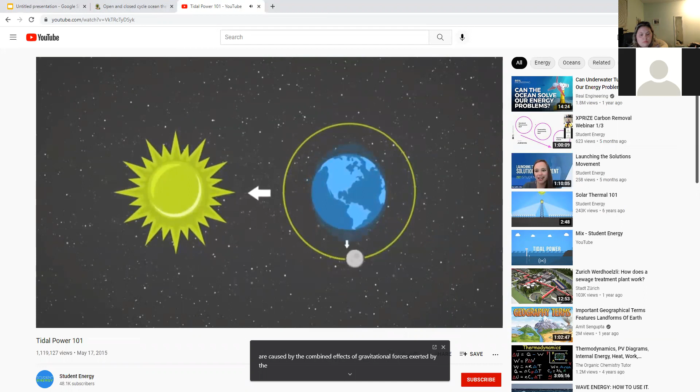Tidal power is a form of hydropower that converts the energy from the natural rise and fall of the tides into electricity. Tides are caused by the combined effects of gravitational forces exerted by the moon, the sun, and the rotation of the earth.

And I'll talk about that a little bit more later on, about the role that the moon plays in tides and in energy in general. Plants can only be installed along coastlines. Coastlines often experience 2 high tides and 2 low tides on a daily basis. The difference in water levels must be at least 5 meters high to produce electricity.

Tidal electricity can be created from several technologies, the main ones being tidal barrages, tidal fences, and tidal turbines. So you'll notice too that these 3 sources of tidal energies are the ones that are covered in the book. So this is a pretty standard way of thinking about tidal energy. Tidal barrages are the most efficient tidal energy sources.

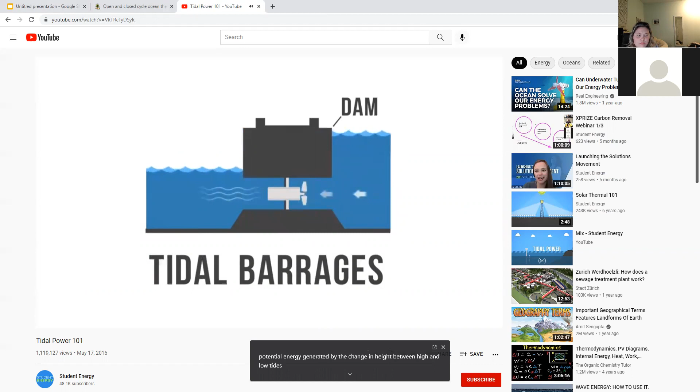A tidal barrage is a dam that utilizes the potential energy generated by the change in height between high and low tides. This energy turns a turbine or compresses air, which in turn creates electricity. So I'm gonna pause there really quick too, so you can see that picture in the left corner there.

And I think that is really interesting because if you've got anything out of the past couple of weeks, a lot of these alternative energy forms are using the same principles. Like I just mentioned, motion is a typical principle because it's kinetic energy and we can convert that. But looking at that tidal barrage, essentially what they're doing there is it's almost like a hydroelectric dam that we talked about a couple of weeks ago, right?

Where you had an area that was at a higher point of water, so they dammed a higher elevation point, and then when they released, all that water fell because of gravity, and then made a turbine spin. So it's kind of a similar situation here. They're just utilizing a natural situation.

So the benefit of that tidal barrage over a hydroelectric dam, or I guess I would say not the benefit, but the similar thing is you're having a barrier that's keeping the water. And when you release that barrier, that water is going down. So again, just a similar situation there, but it's utilizing something more that's a natural situation that happens. We're not changing the environment in that sense.

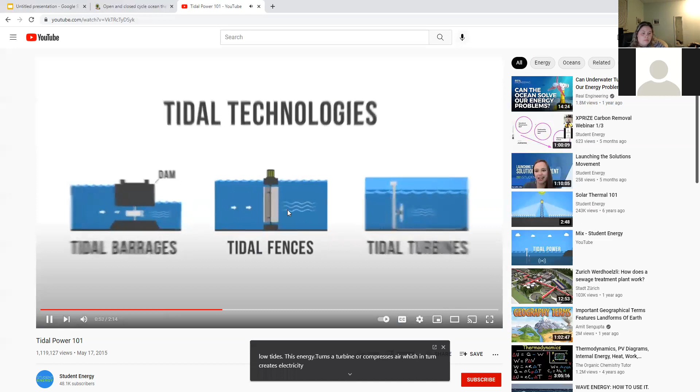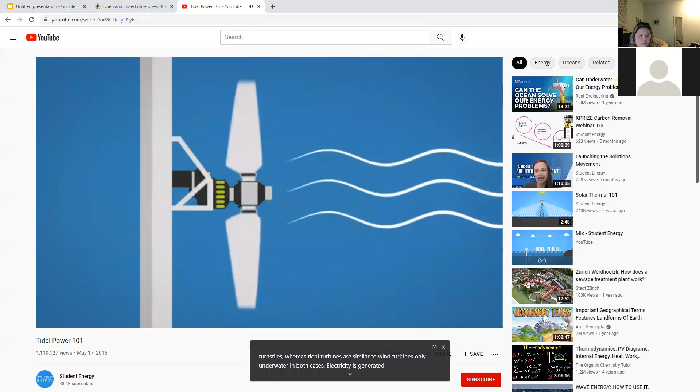Tidal fences are turbines that operate like giant turnstiles, whereas tidal turbines are similar to wind turbines, only underwater. In both cases, electricity is generated when the mechanical energy of tidal currents turns turbines connected to a generator. The generator produces electricity. Ocean currents generate relatively more energy than air currents because ocean water is 832 times more dense than air and therefore applies greater force on the turbines.

Tidal power is easy to install and renewable, having no direct greenhouse gas emissions and a low environmental impact. Because the ocean's tidal patterns are well understood, tidal energy is a very predictable energy source, making it highly attractive for electrical grid management. This sets it apart from other renewables that can be more unpredictable.

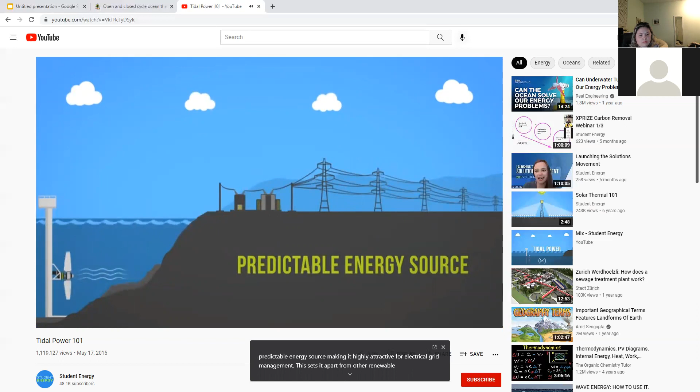However, adoption of tidal technologies has been slow, and so far, the amount of power generated using tidal power plants is very small. This is due largely to the very specific site requirements necessary to produce tidal electricity. Additionally, tide cycles do not always match the daily consumption patterns of electricity, and therefore do not provide sufficient capacity to satisfy demand. I think that was a question on the tidal energy quiz if you haven't taken it yet.

So it was that idea right there that it doesn't always create consistent electricity because you're not always getting the same amount of water, like with the barrage, entering the area. That's tidal power.

But okay, hopefully that was a good introduction of how tidal energy is working. Again, I'm going to stress this point because it is very, very important. You'll see at the end there that they still had a turbine, right? The turbine was moving and that was generating electricity. That is the key to all this alternate energy.

All of these sources, eventually the intent is to get a turbine moving, either by motion, by gravitational force or something. Get that turbine moving, because that mechanical motion of the turbine moving is what can create electrical energy, and electrical energy we can harness to create electricity.

So just bringing that up again. A couple more key points about tidal energy: it's produced during the rise and fall of the ocean water, the tides. It's similar to wave energy in the sense that it's harnessing the movement of the ocean.

However, it is more predictable. The time frame for when there's a high tide or a low tide is very much known and can easily be found. So that's why it is more predictable than wave energy.

I just want to say, when it was talking about tide, it's a very interesting thing. If you go just north of Maine, there's the highest and lowest tide, and that's where, as I showed with the globe, the water gains and gets larger, then moves to the sides, based on how the moon was going around it. The highest and lowest tide there is the craziest thing—it's like 3-4 stories tall, maybe higher, and then within 3-4 hours or more it's completely drained, you could see the very bottom of it. It's crazy.

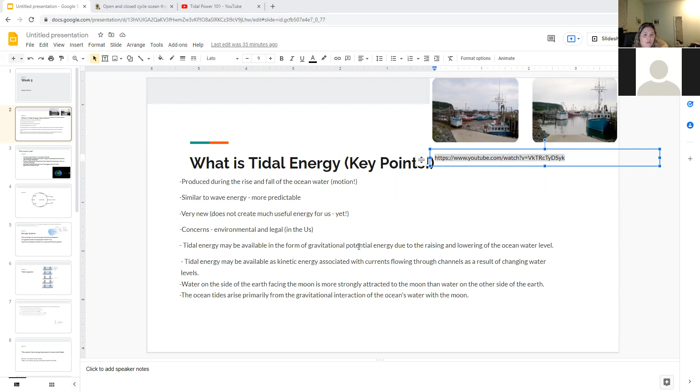And obviously, since the Earth is rotating, the areas of low tide are when it's rotating, and those areas are either not closest and farthest, or somewhere in the middle.

To explain why the farthest side is affected, that's because gravitational force is something called a differential force. Essentially, the average gravitational pull force, at the most typical time, is approximately in the center of the Earth. A differential force means that when there's the greatest difference between the average and whatever it is at a given time, that's when it's going to be biggest. So a differential force is biggest when the difference is greater.

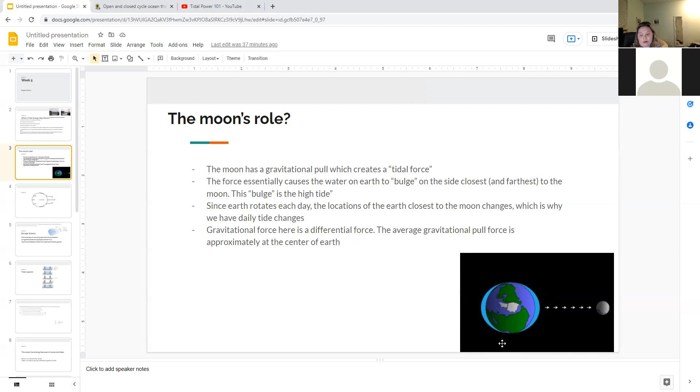So I think that's a really interesting picture, and to explain it further, I love this diagram. This is showing again kind of where it's pulling, because it's a gravitational force that's creating this bulge.

To run into the barrage systems a little bit more - they talked about it in the video, so I won't touch on it too much - but I mentioned it's similar to a dam in the sense that we're dealing with water moving through a turbine to harness electricity, and we're also dealing with the difference, the head loss I guess you could say, if we have an area of low water and an area of high water, and we're harnessing gravity to essentially use this.

So the output of the turbine depends on the head of water. What that means when you ever hear the term head of water, it's essentially just a height difference. So the greater head, or the greater height distance or depth of water you have on that side of your barrage, when you open that gate, you're going to have more water flowing in, which is going to make the turbine spin more, which ultimately is going to generate more electricity. So that's what that is saying.

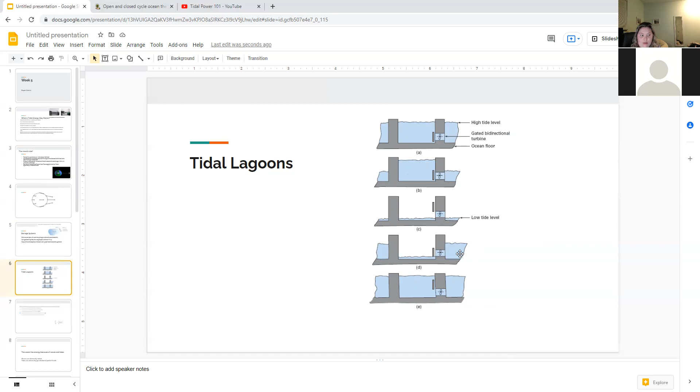The difference, going back to the lagoon, is that when the lagoon is at the lowest point, this turbine doesn't spin. It only spins when you're releasing all that water from the basin. So that's just a difference between the two.

So I want to talk about this question because it's kind of a math question, and I'm giving you the answer, I guess. But essentially I'll just touch on this. Which of the following is not a true statement about underwater turbines as a means of utilizing tidal energy? Let's work through this.

So four of them are true. The turbine is used to drive a generator to produce electricity - we know that's true from both of these examples. We have our turbine, it's moving, and that's essentially generating electricity. They make use of the kinetic energy associated with tidal currents - kinetic energy, energy in motion. Obviously, in these situations, we're talking about gravitational differences, and gravity is pulling the water down, but it's also a concept of kinetic energy because that water is moving. So we know that is true.

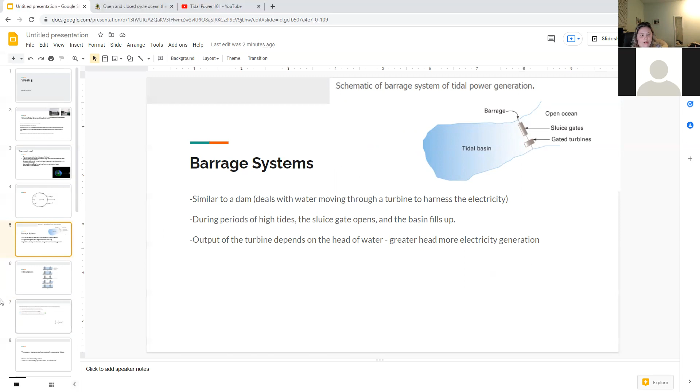This equation, you might not know, so we'll skip that one for now - I'll talk about it in a minute. This next one is straight from the book, so it's pretty straightforward. I think it's 0.3 and 0.4. You can see in the book, wherever they talk about coefficient of performance, it doesn't say these numbers. And then the basic design follows along the lines of the design of a wind turbine.

Again, this is where this question gets hard. Some people could probably justify the answer by saying no, it's clearly a lot different, because obviously you're going to have different components, different chemicals and materials and processes to create a wind turbine versus a tidal turbine, I guess you would say. So that one's kind of difficult, but the easiest giveaway here is this typical coefficient number.

That's wrong, but going back to C - the reason this equation is true is that in the book, they give you this equation on the right, and you can see it's pretty similar. The only difference is this says P over A, and this one has an A in it. So all they did here is move this A to this side, and anytime you have a fraction in an equation with an equal sign, you can move whatever's in the denominator to the other side by multiplying. So if we put times A on this P over A side - whatever you do to one side, you have to do to the other - you put A here, and this A cancels. So essentially P over A equals 1/2 C rho V cubed. It's the same thing as this; they just used algebra to move this A over to this side. So yes, this one is true.

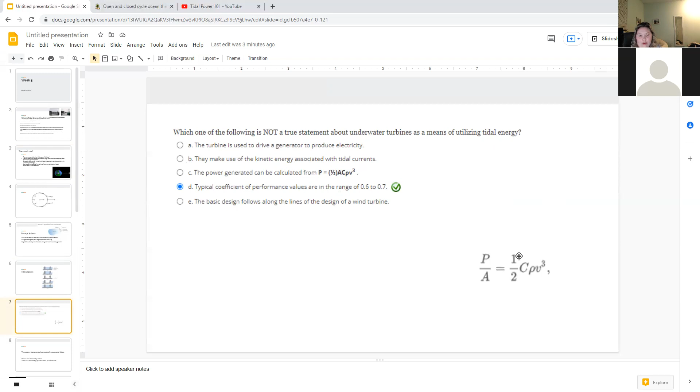And you don't have to do any math there, but I just wanted to kind of show you that that really wasn't a difficult, it wasn't too bad of a math problem.

Okay, so I want to talk about this for a minute too, because I think it's an interesting point. So the ocean has energy because of waves and tides. And this is a quiz concept, and this was one actually on the quiz. I was looking at some of the questions they were asking, and I struggled on this for a minute because I think it asks the ocean has energy because of waves and blank. And I wanted to say because of waves and wind, because it just made sense in my mind.

And then I thought about it a little bit more. So the answer is because of waves and tides. And we know that because we utilize the concept of waves to create energy, just like we utilize the concept of tides to create energy. And we also know that waves are driven by winds. So winds aren't causing energy, but the waves are.

And likewise, tides are driven by gravitational pull of the moon. So that is why the answer here isn't winds, and that's also why it isn't the gravitational pull. So the answer is waves and tides, because those are legitimately the reasoning for why we have energy.

Okay. So the potential generator, oh, I like this question. Another math question that really isn't too bad if you look at it. So the potential energy available from tidal movement is, and then they give this weird equation that you don't need to know. But from this, determine what the average power available over a tidal period T will be.

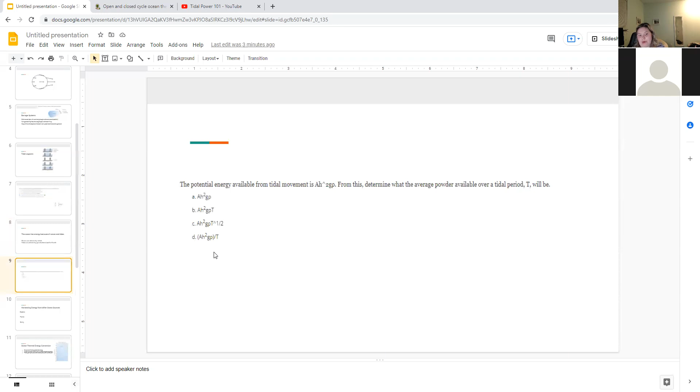Just for example, let's say that this tidal period was 10 days, and we wanted to know the average energy each day over the 10 days. So the way that we figure that out is we use this equation and calculate the total potential energy over that 10 days. And then we divide it by 10 to figure out the daily potential energy. So that's just why the answer here is divided by T. And again, it's just because you always divide by a period. So I wanted to show this answer because it looks like it's a heavy math problem, but it really isn't.

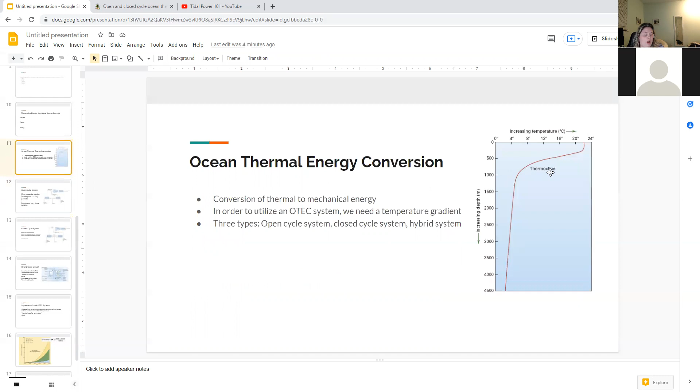So the reason this is called an open system is because it's open to the atmosphere, or I guess the environment, right? We're not using any other chemicals or anything. We're simply harnessing the idea that we have warm water and we have cold water, and we're going to use the warm water to create water vapor to move a turbine, and then we're going to use cold water to cool that water and then restart this whole process. So that's essentially what an open cycle system is, and how we are generating electricity by using that thermal gradient.

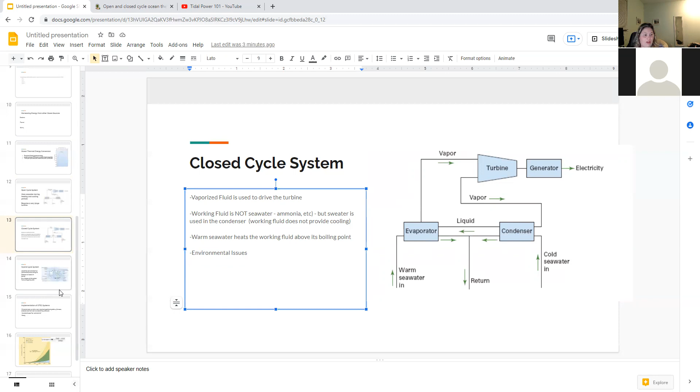But okay, back to this: environmental issues, clearly, when we're using a certain type of liquid or chemical in the situation. That's probably the most significant thing here. So hybrid cycle system, that's the third type of system. Essentially that's using both seawater and another fluid as the working fluid. The condenser is still cooled with seawater, but unlike an open system, only the vaporized fluid is running through the turbines. So in this situation, we've got the harnessing of both water vapors. Okay, so those are the three types of systems.

To touch briefly on this, and this is actually my last point: the implementation of OTEC systems, which stands for Ocean Thermal Energy Conversion systems. We can either have one on shore, mounted to the ocean floor, or floating. And again, this depends on whether we have a hybrid, closed, or open system. So when something, oh yeah.

I just wanted to ask you a quick question. What is your opinion on the hybrid between water and wind power turbines? It's a new thing they're coming out with. They put them on a beach in a concrete box, basically. When the waves crash into the walls, it pushes the wave up inside, which causes air to flow out, and it causes a fan to spin. And when the wave goes back down, it causes wind to come back in, turning it again, and makes a generator make electricity.

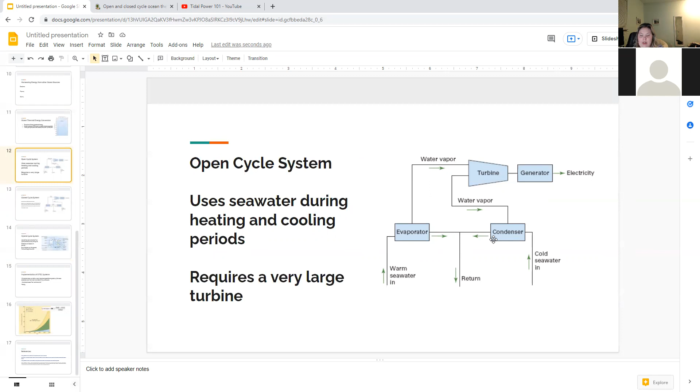Positive to this, and a really interesting one, is that this process of evaporating and condensing the water, essentially that condensed water loses its salt. So that condensed water becomes fresh water, and that is a suitable drinking water source. That's really interesting, especially because I mentioned that it is expensive to use reverse osmosis at drinking water plants to get rid of the salt in water, but this is kind of killing two birds with one stone, right? Because it's creating energy and creating fresh water, which requires a lot of energy.

So I think the one question I would have here, and the book doesn't talk about it, but going back to the closed cycle and a hybrid system, we're using another fluid. Is there potential for that fluid to get into that finished water that we'd potentially treat? That'd be a big concern for me, because some of the other working fluids they use besides ammonia is like Freon, which is definitely not something that we want in our drinking water. So that would be a question I have there.

And the other two, it can be mounted on the ocean floor, so somewhere on the continental shelf, pretty deep in the ocean, which probably has a lot of upfront costs too, just getting it down that deep. And then we can also have it floating, which is probably the cheapest and easiest way. But I don't really know if the book touches too much on the concerns with having it floating, but I imagine maybe it could impact birds and everything that float on the top layer of the water. And then this is just what I already talked about.

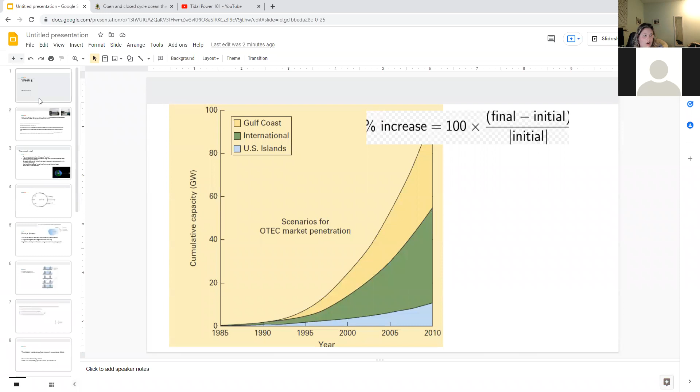So that's all I had for today. Hopefully that was interesting, helpful, something. So this was again chapter 13 and 14. I'll probably talk about 15 and 16 next week. And then the following week is our last week. So you have just a couple more weeks to get these last couple quizzes done.

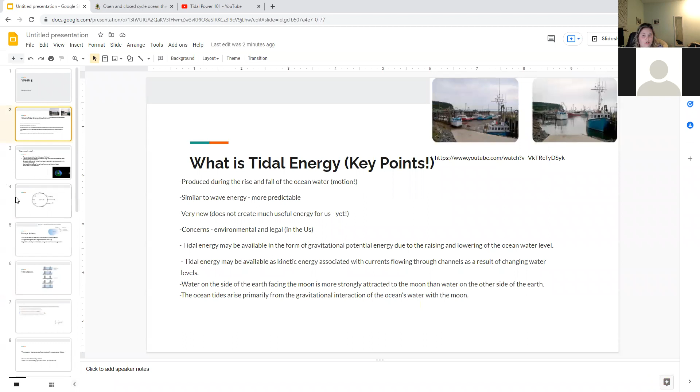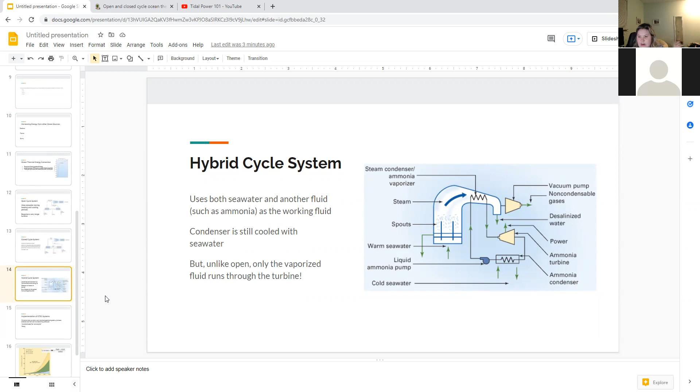Hopefully I tried to touch on quite a few of the questions they ask. I didn't touch too much on the salinity side, but the book has like one page about the salinity gradient. This was all about the thermal gradients we were using. So definitely read that. But it's pretty straightforward, and a lot of the questions they ask on the salinity gradient are straight textbook. You can easily find the answers. But if you have questions about them, just send me an email and let me know. But for now, that is all I have.